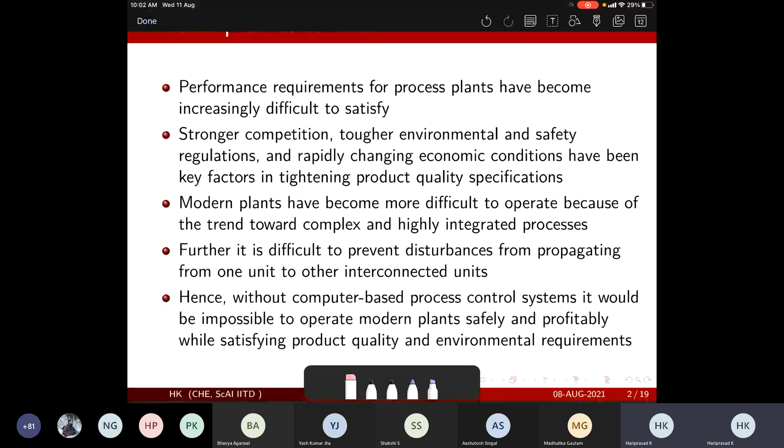The most important aspect we are looking at here is we are trying to see process not as an isolated unit, but as process plants. In the other unit operations, for instance heat transfer or reaction engineering, we might try to see isolated units. For instance, we would like to see heat exchangers, or maybe a reactor. Then, of course, if it's a fluid mechanics problem...

So there is some lag, I guess. Give me a minute. Yeah, it is done.

And maybe if you are looking at transport, mass transfer or heat transfer, you might look at another individual unit, for instance distillation. And if it is fluid mechanics, you may talk about pipe flow and so on. So what I am trying to say is, we were focusing mostly on individual unit design or how it works. What process control is talking about is the process plant as a whole. So you are trying to see the concerted effort of various process units which are working together. So all our arguments would make the most sense when we are dealing with a process plant.

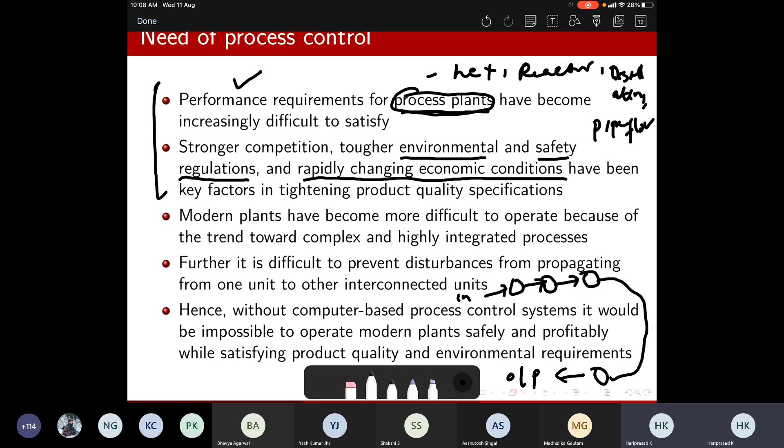So you are not talking about one unit, there may be units which are connected. Your raw materials would start from unit 1, then it would percolate, and it may go to n number of units - you don't know that. This may be the output, this may be your input, and this may be your output slot. And what eventually can happen - input can also be from multiple units. Let me tell you an example.

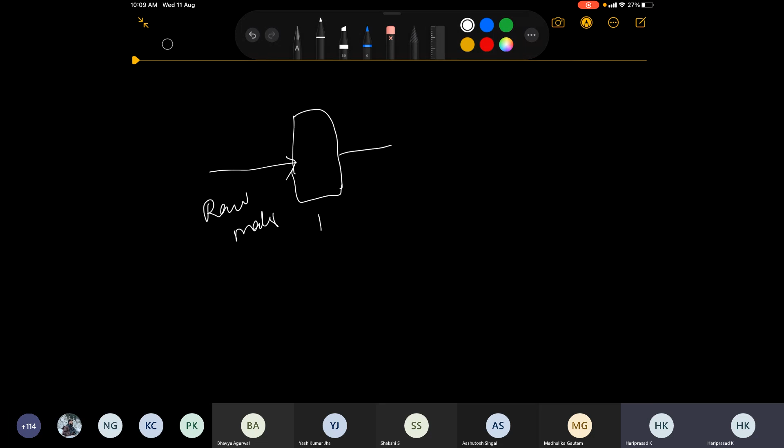Of course, you will have n number of units. So you may have your raw material, then some pre-processing, for instance basic pre-processing. Then it might go to, I'm talking about simple, a pre-cleaning stage. Before you need to do something, then it might go to a reactor.

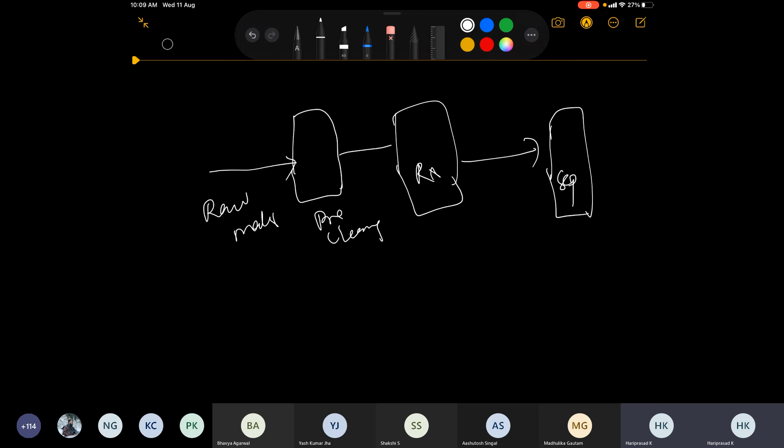Then it may go to a separator. Each of these reactors may have heat exchangers in line, so the reactor might be connected with heat exchangers to maintain necessary temperatures, and so on and so forth.

Same with separation, you may have something else. For instance, there may be co-current flow of something to separate, or counter-current flow of something to separate. Finally, after X such transformations, you would get eventually the product which you are selling into the market.

As you would really see, each of these individual units is getting its inputs from the preceding unit. Of course, the raw material may go to unit 1, then it may go to unit 2, which is connected with unit 1, and so on and so forth. Eventually, unit n is definitely connected to unit n minus 1.

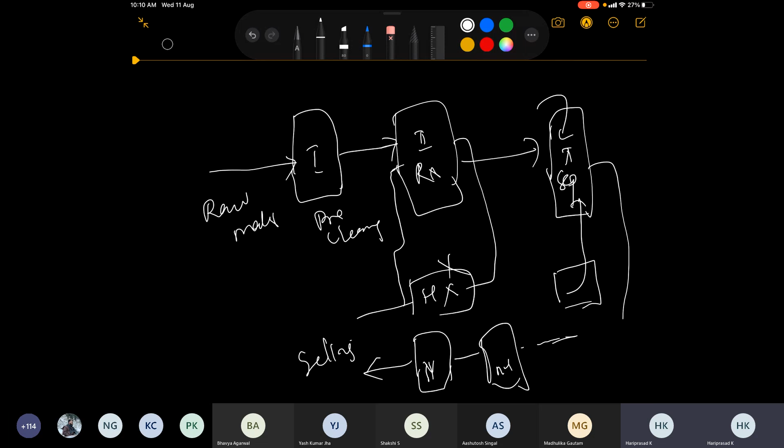So the problem here is that, let's say if something bad happened here, for instance, let's say the heat exchanger got tripped. What is going to happen? Your reactor temperature could go up.

That eventually would happen. You might start sending the undesirable product to the separator. Then the separator load would increase, because you need to have more pure output. So this would possibly, if there is a pump here, and if you're sending some absorption liquid, the load of the pump goes up. Eventually, the whole system would go under tremendous stress.

So what we are trying to say here is that, due to this enormous complexity, it is very difficult to prevent the chain of transmission of disturbances. Disturbances could be anything, as I told you, it could be just as simple as switching off your pump or tripping off your pump. So it's impossible for one person, or maybe even a group of people, to manually manage this.

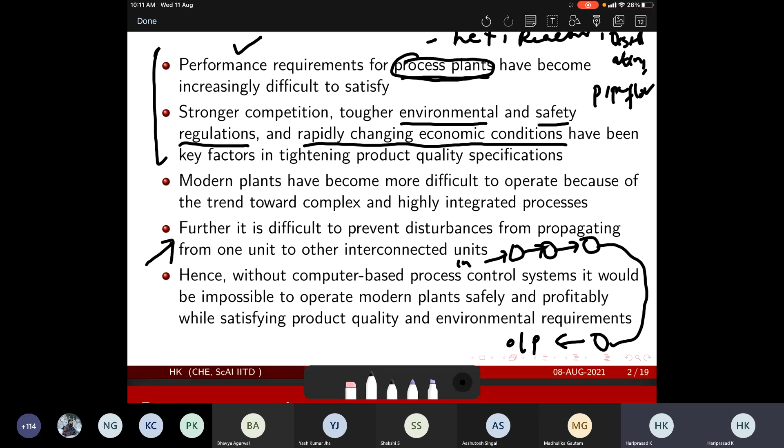Let's look here. So there are n units, and let's say each of these units would be doing some certain unit process or unit operation, and there are multiple parameters associated with it. For instance, you may need a desired temperature, a desired pressure, you may need a desired flow rate. Then, for instance, you need a catalyst with certain packing efficiency and void fraction.

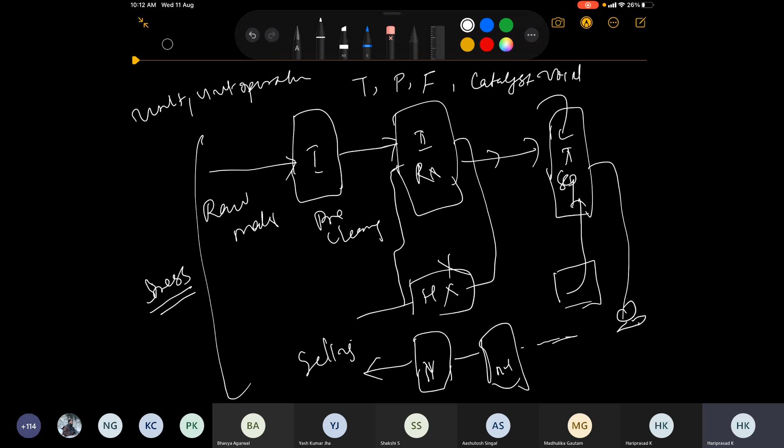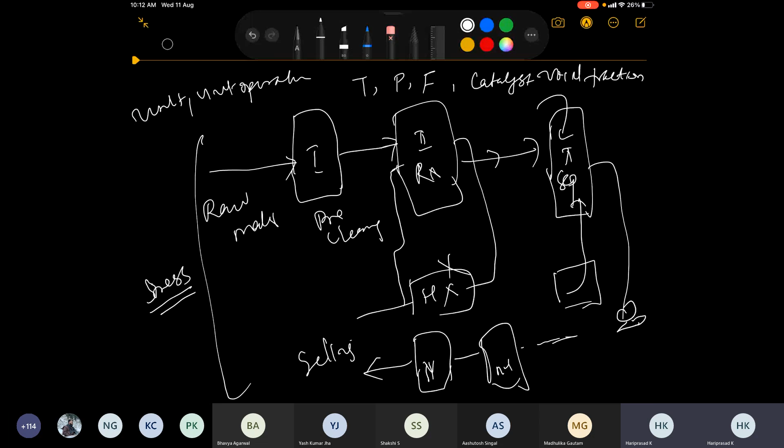So when you start listing the parameters, it's eventually going to be a very difficult thing to kind of bookkeep. And as a man, it's even difficult to do it manually. Bookkeeping itself is difficult, and manual bookkeeping would make it further difficult.

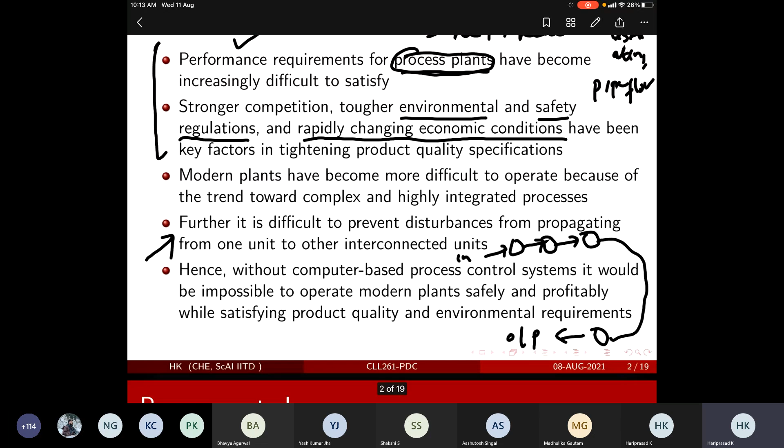So what is the solution? Automation. So what will you do? What would happen in automation? Of course, things are controlled remotely, and you only need minimal manual intervention. You cannot get rid of manual intervention at any point in time. Even if you are using a driverless car, at some point you may need to do a manual intervention. So manual intervention is impossible to remove wholesale, but you will be able to reduce the level of manual intervention.

So why? What's the advantage of that? If you reduce the level of manual intervention, then the level of subjectivity is getting reduced. So what is the advantage of reducing subjectivity? Humans are very subjective, so his or her decision would be mostly dependent upon various factors, including the emotions at that particular time.

So it's important to take away all such subjective decision making, because you are playing with a huge market wherein a 1% error in decision making can even result in loss of millions of dollars.

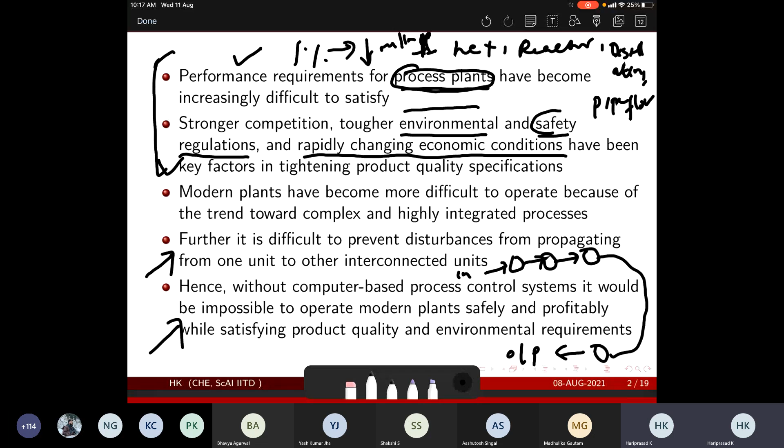In process plants this becomes most critical. Automation, as I told, is an interfacing area. Many of your colleagues and other students would also be learning automation in different ways. For instance, electrical people might be learning this - they would learn it as control theory.

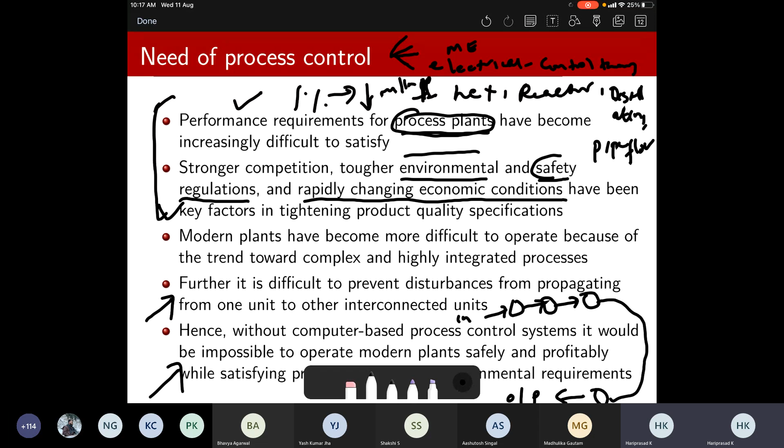I would assume mechanical people would also learn a little bit because they would need to do the production and some aspect of that, as I told in CS. So eventually everybody would try to employ this because automation is a very general keyword. Even you could automate your business - that has nothing to do with process control.

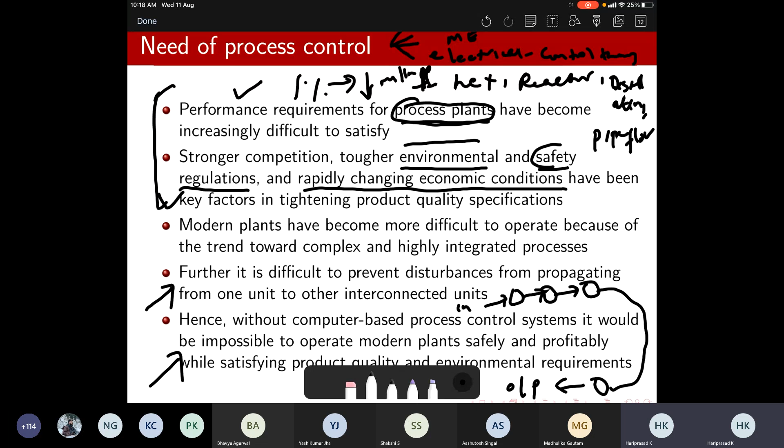But the automation of the overall process plant is more non-trivial because you are dealing with systems, you are dealing with human in the loop, you are dealing with variety of conditions, so on and so forth. So it's a non-trivial problem which is difficult to solve by a human as an individual. So it's better to do automation.

If you are going to go with automation, eventually what is it that we need to do? You're anyway ready to invest. So what is the best thing that you would be able to do? The control system, or whatever the process control system is, will be able to maintain a process at the desired operating condition.

Which means you have lesser trouble, safely and efficiently, because keeping it safe does not mean that you can also lose out on the dollars. So it has to be meeting your economical equation, and of course environmental regulations.

You would see the carbon footprint and recent news articles regarding IPCC wherein the emissions are leading to - it is sure that over and over the environmental norms are going to be stringent. It would also bring in a lot of stress, and most importantly, the quality.

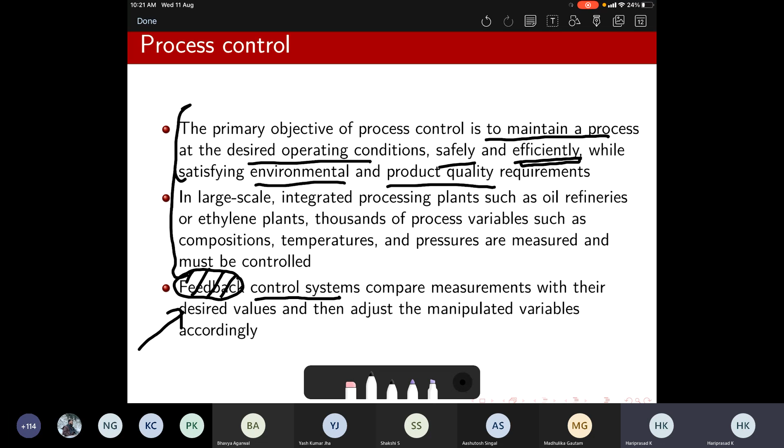So forget about this word feedback for now - we will learn this in more detail. So what is the advantage? You have to play a game, right - so what is available, what is in your disposal, and what do you need to achieve?

So you have to achieve, of course, this is your problem statement. You need to achieve process operation at the desired condition safely, etc. What all things are available to you? By blanket understanding, by doing a process control system, you would achieve this. But process control system also needs some guidance. So what is its degree of freedom to play with?

So there are sensors in the plant, various sensors. Consider any example where you would like to do automation. For instance, a driverless car. There are a lot of sensors that track GPS information, road traffic information, proximity to the nearest vehicle. Similarly, in the process plant, all these units are equipped with various sensors that measure key variables.

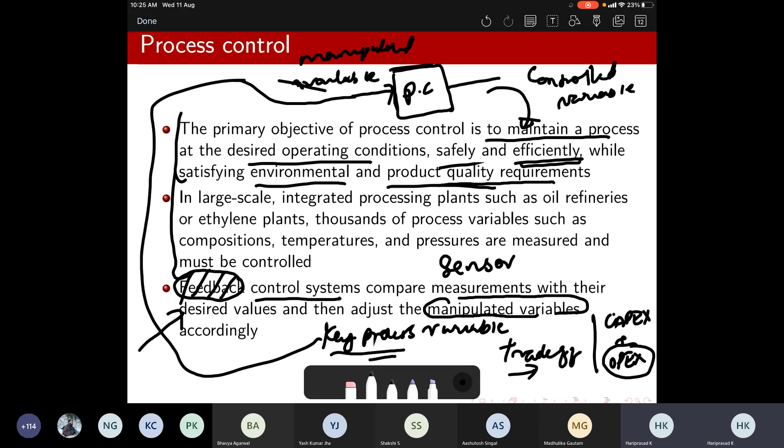As I told you also yesterday, we have to learn process dynamics to learn process control. Why? Because if we are dealing with real time, consider you're driving a driverless car. You have to take decisions with respect to time, every instant, every second, or even every millisecond. So you are working with a system that is fully in unsteady state condition, or you call it transient, or even dynamic. All of these words are namesake, so you may use any of them to represent the overall strategy.

While when you design, things are all at steady state. So you might not be using this dynamic information when you design a heat exchanger, because it would be designed for a maximum capacity, assuming this is the maximum value it takes. So they are all steady state. Whatever you have learned would be mostly the design or design equilibrium relations, and equilibrium is a steady state condition.

So you cannot approach this problem with that context. Things are all dynamic, so you probably need to look at the problem in a dynamic framework. You have to learn a system. Of course, the process systems won't change, but the way you approach them would change. You should be able to model them dynamically.

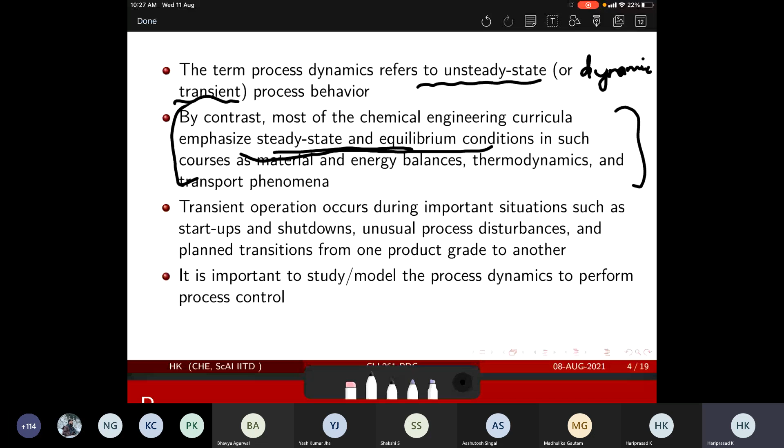All the operations in a process plant are highly dynamic. I don't see any case where it would be steady state. So while you design, you do it for steady state, otherwise you will not be able to design. You consider a maximum operating condition, a maximum capacity condition, and design for that, assuming anything below this capacity would work well. You will not operate anywhere close to or exceeding the full capacity, so a factor of safety is included while designing.

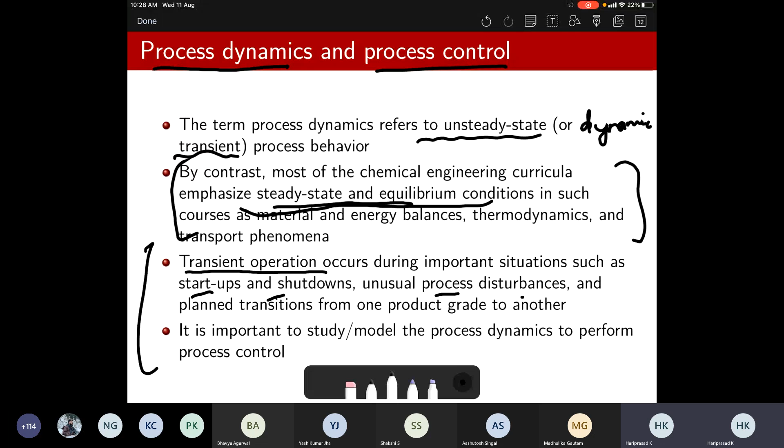But when you run an operation, you will have to look at how it varies with respect to time. For instance, startups and shutdowns are everything transient. In startup, your conditions would change from time to time. In shutdown, your conditions would change from time to time, and so on and so forth.

That's why we need to really learn the dynamics before we embark onto control. Learn the dynamics clearly, because all your decisions for control depend upon the dynamics. So dynamics is what dictates you to take a particular control action. Eventually control means it's an action, and this dynamics is what dictates what action should be taken. This action would again drive you to another dynamic condition, so this is an ever-running loop which is feeding back and forth.

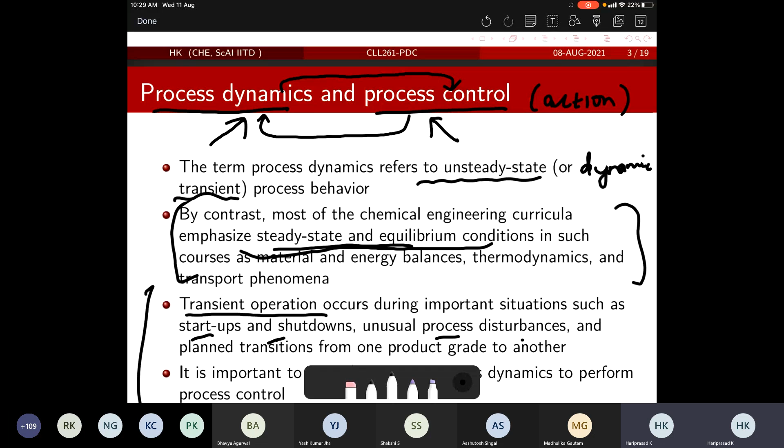Before we go ahead, any questions at the moment? If you have some queries, you may also keep writing in the chat. Maybe after some time when I take a pause, I'll be able to read it and give you feedback. But if you need to instantly shoot questions, that is also welcome. Anything is fine. Any questions so far at the moment?

I hope I am audible to all of you. Yes sir, you're audible, but there's a slight audio issue—some people are reporting that your voice is breaking in between because of some interference. Okay, so whenever that happens, do let me know immediately. I hope it is fine now. I'll just ask the few students who reported it. Okay, give me an update, meanwhile I'll go on.

So eventually, you will have to see your decision space. You will have to deal with process—material can also undergo a conversion from feed material to product. You would have chemical or physical operations. A chemical operation would imply a reactor. A physical operation would involve cleaning, separation, heat exchange, and so on and so forth.

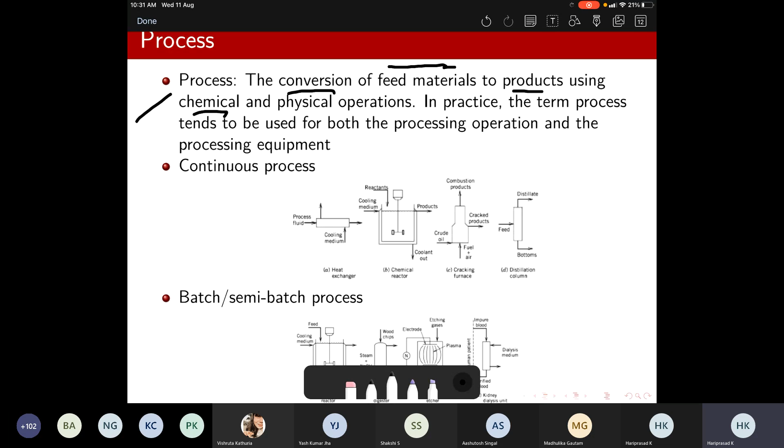Now you will have to see the level of complexity you will have to deal with. The process could be continuous, and it could also be batch. What is the difference between batch and continuous operation? You might have done this in your CRE lab. Continuous is ever running—for instance, a CSTR is a clean example.

In batch, you charge everything and let it run for a fixed time. Most likely it will be a fixed-time batch—you charge all your feed, close the knobs, everything, and operate it for a fixed time. So unlike continuous operation, none of them would eventually lead to a steady state.

Continuous operation would lead to what is known as quasi steady state. What do you mean by quasi? I will talk about that. While batch process will not attain any steady state—it is fully unsteady state.

Quasi steady state means, let's say you are looking at a temperature with respect to time. For some point in the window it might look to be steady, but it is varying. So if you look at the delta time, it may look to be steady—this is quasi steady, and batch would be fully unsteady. So depending upon your decision making and the problem you need to work on, the decision making would also be different. Here you may have more room, but there you will have less room, and so on and so forth.

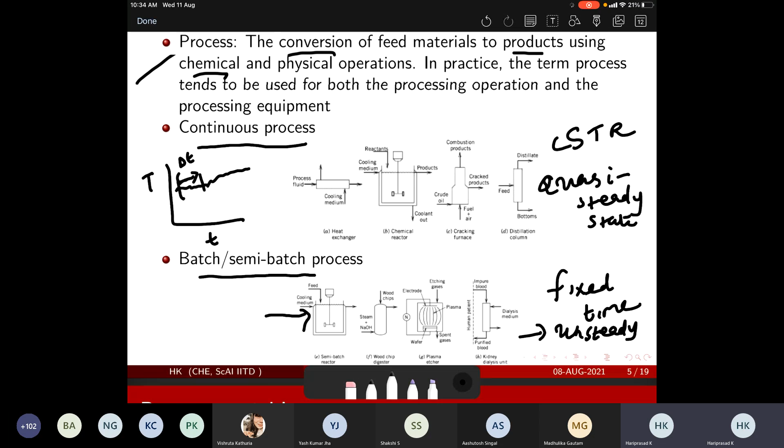Is that audio issue still there, or are you okay with that? The students say it's better now. Okay, let us know if there is a problem so I can check for any network issue and so on. Okay, let's see—hopefully this is clear to all of you.

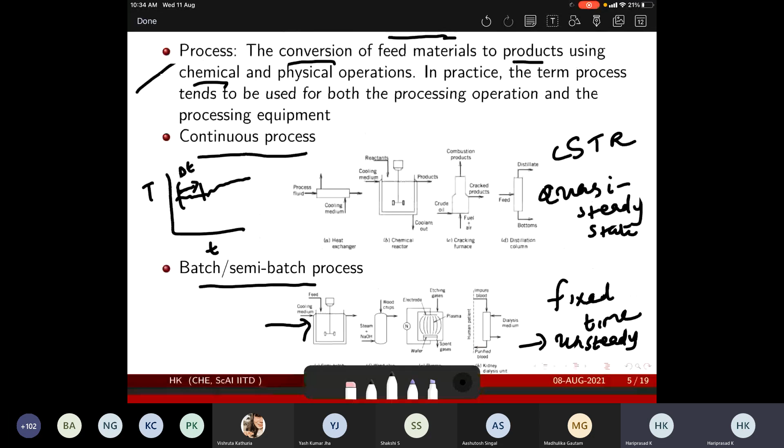So let us see some key terminologies or keywords that you would need to use in the context of process control. One is, of course, our requirement, controlled variables, generally called CV. If you are working in industry, nobody will say control variable, they'll say CV. What is a CV? Of course, not your kind of a CV—it is a control variable, that process variable which is to be controlled.

The desired value of the control variable is called a set point. People might use the term 'set point' or 'set-point', so on and so forth. What is a set point?

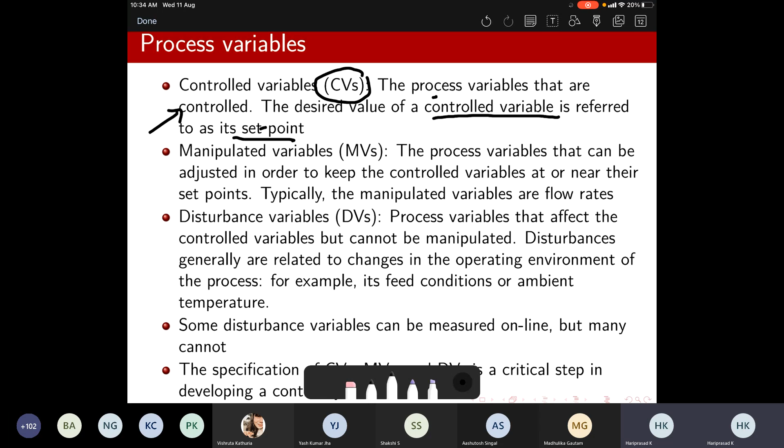Let's say you need to operate a reactor temperature with respect to time. Unlike all other systems, we talk about this with respect to time. This is T, and you will have a T reference, which is your operating temperature that you need to achieve. Your physical temperature will not be T-ref at any point in time.

Let's say this is 350 degree Kelvin. When you start the system, it would be at the ambient condition somewhere here, then it will go up by means of some changes you are making. Then this is your set point.

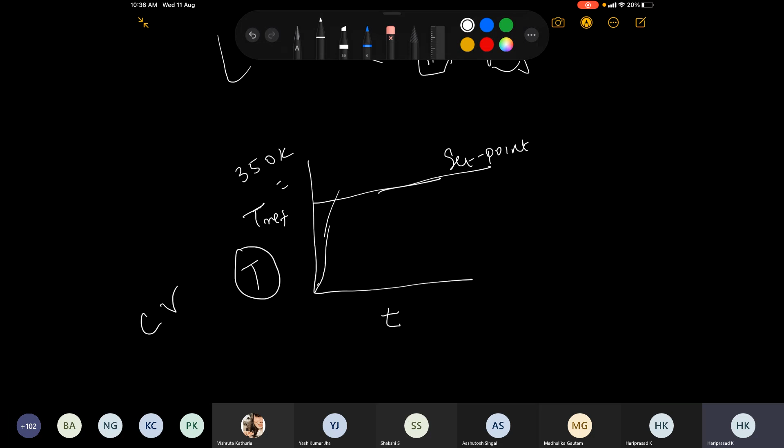Tref, which is T that you need to control, this would be your control variable. As I told you, the temperature will not be equal to the set point. There would be some variability, as variation would keep on happening due to various things.

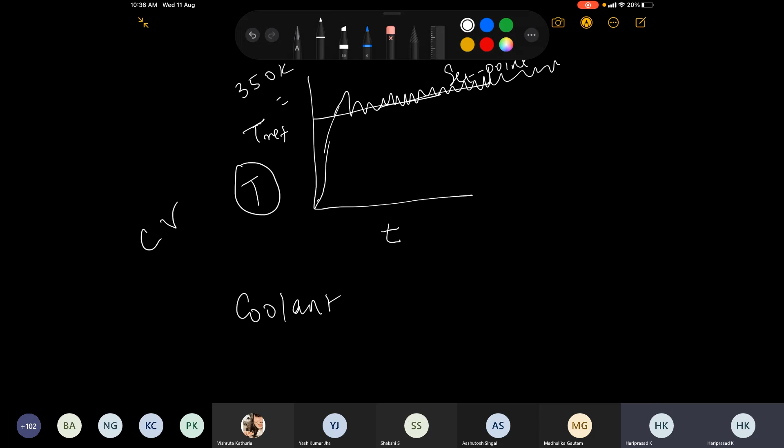Let's say you are using coolant flow rate, because temperature needs to increase or decrease by means of coolant flow or maybe a heating line, whichever it's up to you in whichever plant you are working, whichever is the space for your decision, you might use one of these to increase or decrease the heat.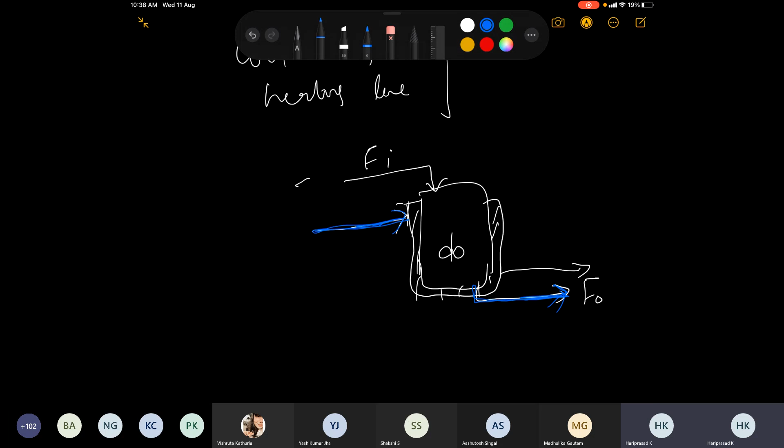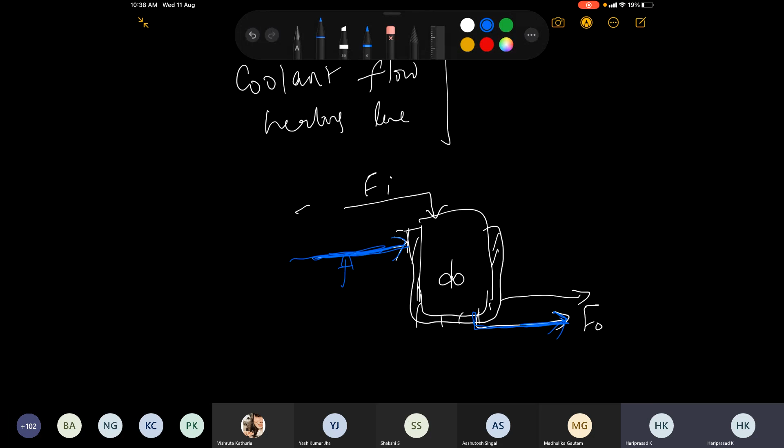Your optimal conversion or optimal yield would be happening at a certain temperature, because all reactions are a function of temperature, starting from your Arrhenius condition, so on and so forth. So you have some room to play around with this heating or cooling line to maintain the temperature. Let's say that is what you are going to do.

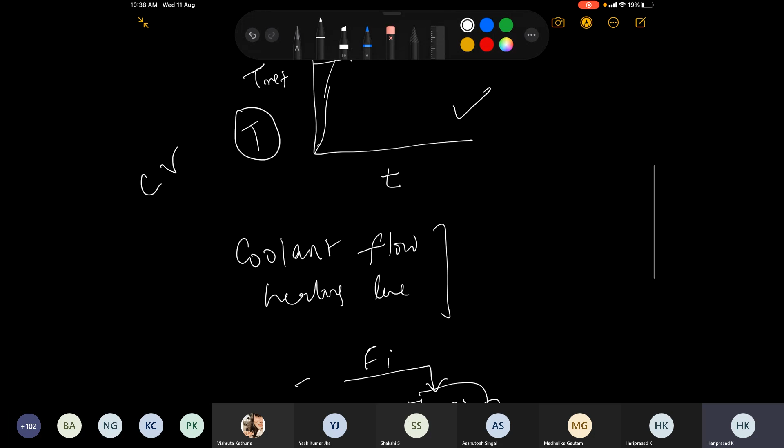So the temperature inside the reactor is your control variable, and the coolant flow, I'll say CF, coolant flow, or maybe heating liquid, whatever you'd like to call it, would be your manipulated variable. They call it MV.

So eventually, what are the things that would result in the output concentration? Eventually, you are looking at the purity of the product with respect to time. Again, with respect to time, that's most important.

Let's say you are manufacturing a drug, then most likely your purity requirement would be 99.5 or above. This is eventually what is expected: while keeping the temperature at the desired level, the reaction would happen and you would get a purity or yield as necessary. So you can play around with the manipulated variable, the coolant flow rate, to achieve all of this.

Let's say you have got a bad feed one day, because eventually it's all market driven and also depends upon economics. Let's say sometimes you decide to take a luck buying a low quality feed, low quality raw material. Low quality in the sense, I won't say it's really low quality.

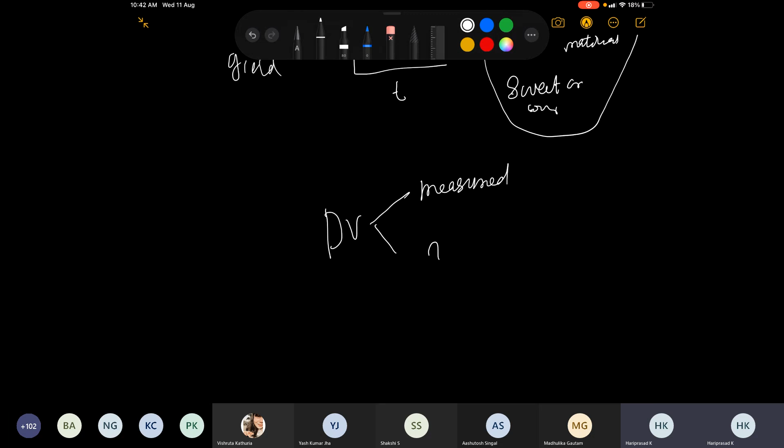Some of these disturbance variables are measured, some are not. So disturbance variables could be further classified as measured or unmeasured. Measured means you could quantify the variability, while unmeasured means there is no means to quantify the variability.

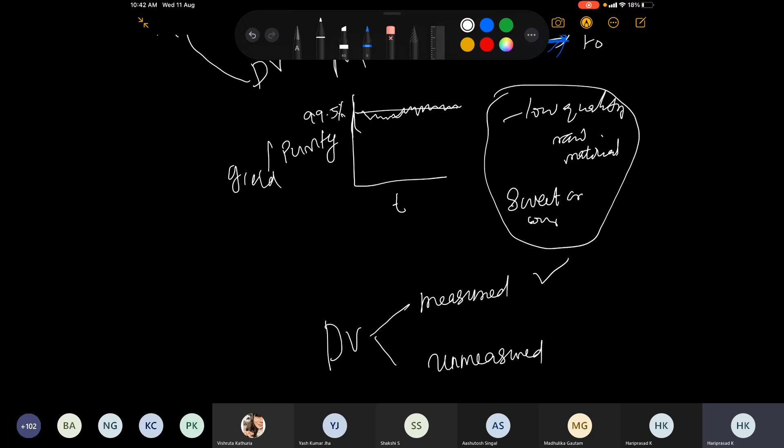In most cases, like crude oil, you may be able to quantify it, because when you buy it, you do a feed check. So you would measure it, and it would be calibrated, knowing that your system is going to get disturbed because you have a poor quality crude.

So we were talking about measured and unmeasured disturbance variables. How do you measure? There may be some analytical way to measure, because when you are buying a feed, you should be able to check. There are analytical ways to check the quality, and so on.

Let's say you are sending this coolant flow rate into the plant. This is your coolant flow, and you are expecting a certain rate. This requires circulation - it would go somewhere and some would come back. You will have a pump here that does this circulation, helping you circulate the coolant.

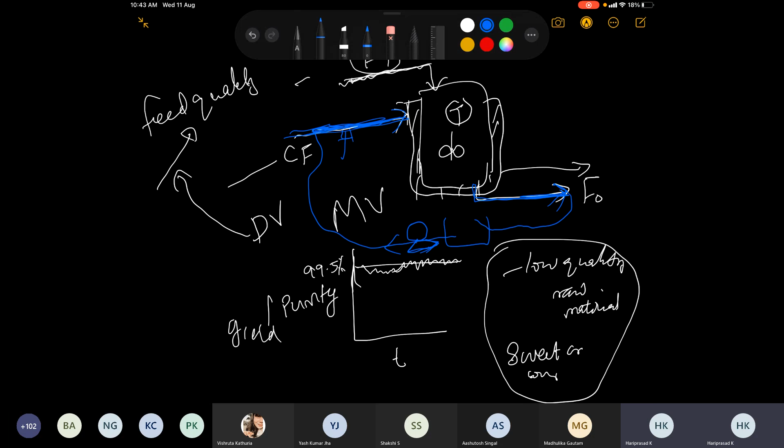Let's say the RPM of the pump keeps on decreasing. How do you measure or detect the pump's output flow rate? The pump specification is in terms of output flow rate, possibly by means of rotation of the impeller, connected to a shaft and a motor running at a certain RPM.

Let's say your rated RPM is X, maybe 100 or 200 RPM, whatsoever - this is what you would expect when you bought your pump, that it would deliver flow at this particular rate. Over time, due to some malfunction, this has become 190 RPM, or maybe 180 RPM. How do you come to know?

Because you don't have a measurement to check the flow rate anywhere, you would assume the pump delivers its rated flow. So what happens? Your coolant flow rate, which you would expect at maybe 10 liters per hour, might keep on varying - it may now be 9.5 or 9.2. That brings in the variability.

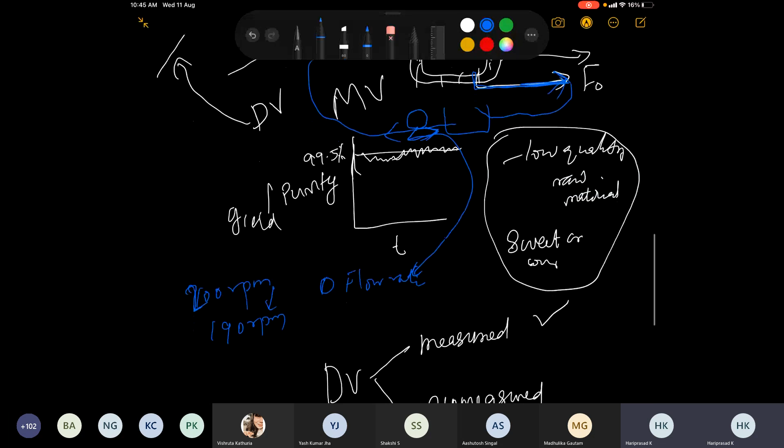There is no way to measure this, so such conditions become unmeasured - it is a disturbance, but an unmeasured disturbance. How do you come to know there's a disturbance? When you start seeing your temperature variability is high, you can go back and check. That's the only way if things are working fine.

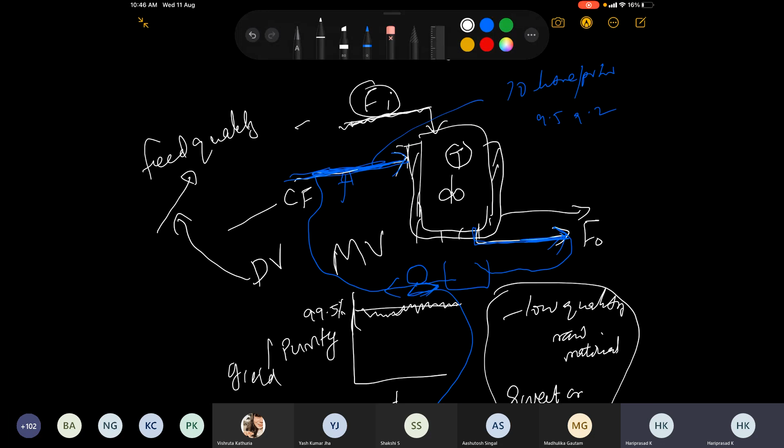The temperature is of course controlled by the coolant, so there is some variability in the control, but you cannot get exact information on how, unless you put a flow measurement here. Then you will be able to get it.

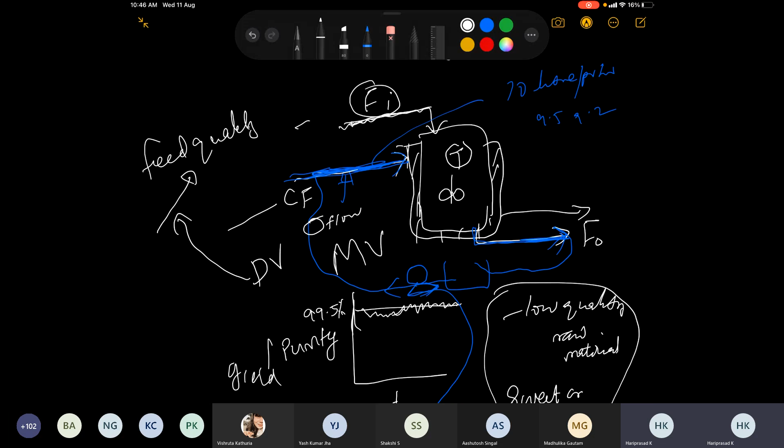As I told you, when you do this trade-off in terms of sensor placement, some sensors you won't deliberately place to save on economics, while some places you will have to keep. At the checkpoints where you don't keep a sensor for measurement, that would eventually become your unmeasured disturbances.

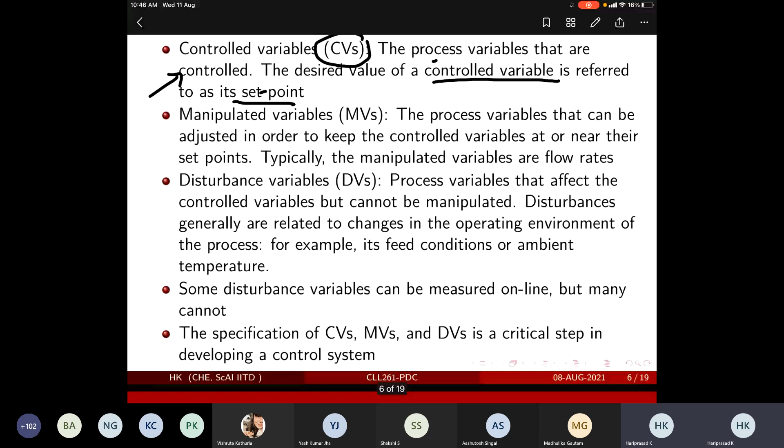Manipulated variable - you can read the notes. Manipulated variables, disturbance variables.

Disturbance variables could also be due to ambient conditions - for instance, a sudden change in temperature, your overall ambient temperature. This may not happen in a tropical country, but it could happen somewhere in North America or Europe. Let's say on a fine day your temperature is close to 30 degrees C.

And in the afternoon it starts snowing, so it goes to minus 2 degrees C. You might have set your whole operation considering it's summer time, expecting lesser variability in temperature - maybe plus or minus 5 degrees - but now you see a drop of minus 32 degrees.

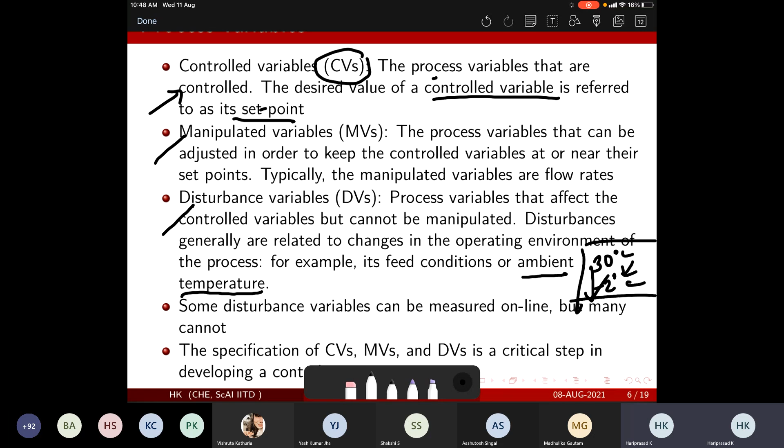These kinds of things you may not be able to predict - sometimes the weather forecast might not give you this. If you got to know by weather forecast, it would become a measured variable, a measured disturbance, and then you would be prepared to deal with it. But in this case, you are not.

Okay, so the key aspect. Let's say you are hired as a process control engineer or specialist in an industry, and you have been asked to design a new plant. You are in charge of the process control team, and your first major job is to identify three things: what are the control variables, what are the manipulated variables, and what are the disturbance variables. All your decision making would depend upon the clusters of these variables.

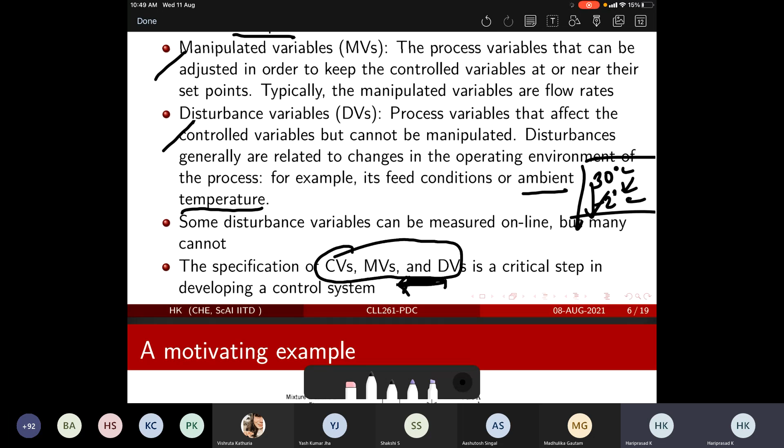That's the problem. We'll go a couple more slides.

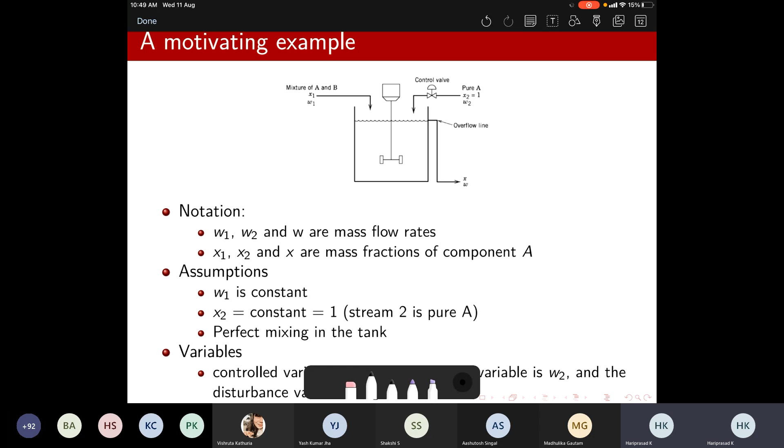Let's consider an example similar to what I told you before. It's a reactor, but in fact this is just a mixer, there's no reaction happening. You have two feeds: this is feed 1, and this is feed 2, and this is your output. What is happening is you have a mixed feed of A and B coming to the mixer, and a pure feed of A coming to the mixer, which you have a way to control.

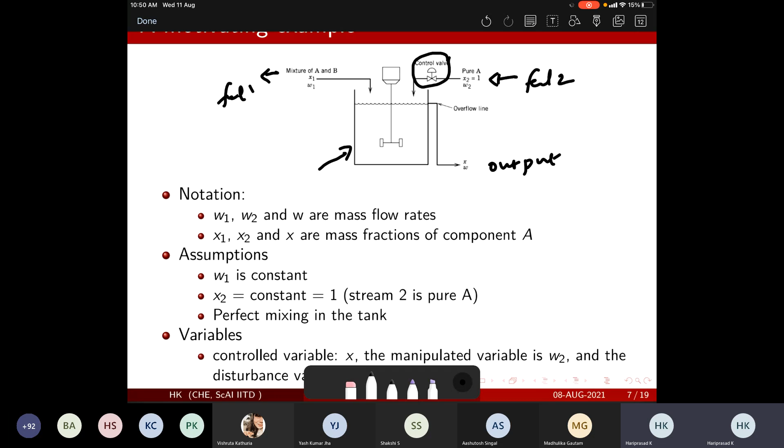So how do you control it? We will see, but assume for the moment that you will be able to control it by means of a control valve. We will see about that.

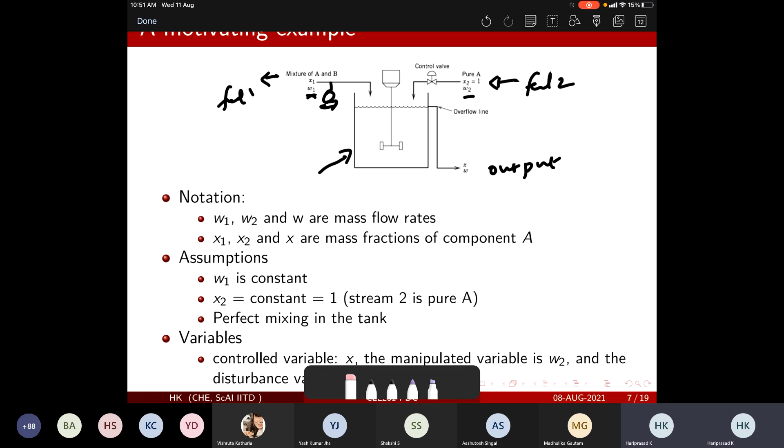W1 is the mass flow rate of feed 1, W2 is the mass flow rate of feed 2. X1 and X2 are the mass fractions of component A in the feed. We assume the flow rate W1 is constant, because you have a pump somewhere that gives a constant flow rate. The second line, W2, you will be able to control since you are a process control person. It is also assumed that X2, the feed 2, is pure A.

What do you need? You need the output concentration to be a desired value. That's basically the mixing problem: feeds in, feed out, and your output should have a desired composition. So the control variable is X, the output composition, and the manipulated variable is W2, because you are playing with it, while W1 you cannot play with because it's at a constant flow rate. But you don't know the composition of X1, it can vary, while here the composition is fixed. You see the gain - here you are feeding pure feed, but its flow rate can be changed, while on the other side its flow rate is fixed, but concentration is variable.

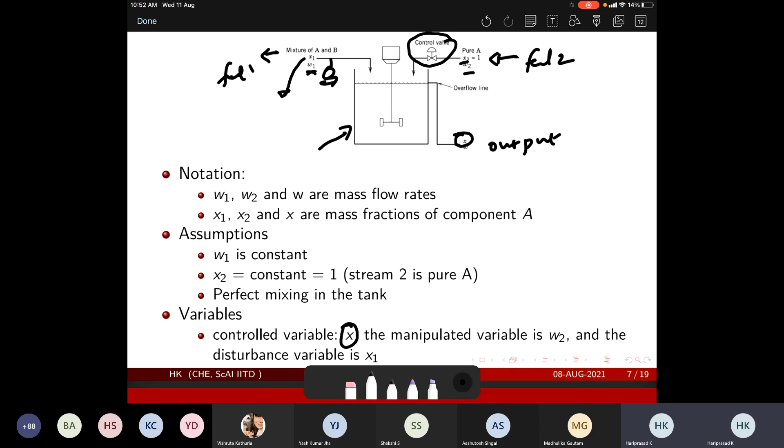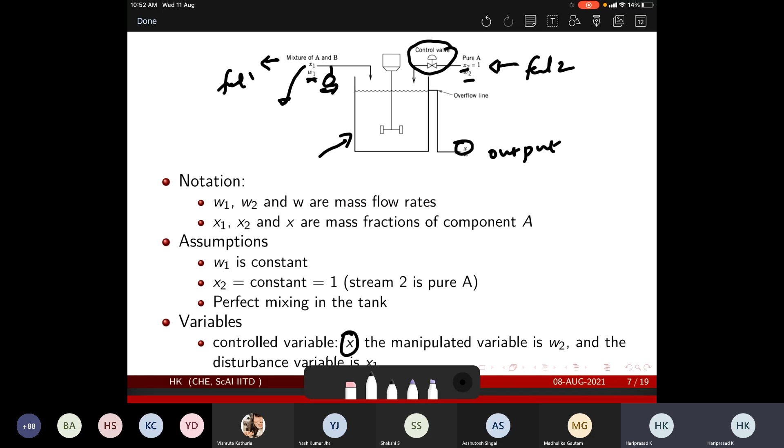So what is the disturbance variable? Because you don't know the value of X1 - at feed 2 only you know the value of X2, because it's pure. While X1, you only know that it's X1, you don't know the value. So this becomes the disturbance variable. And the manipulated variable, because we are adjusting the flow rate, it becomes W2.

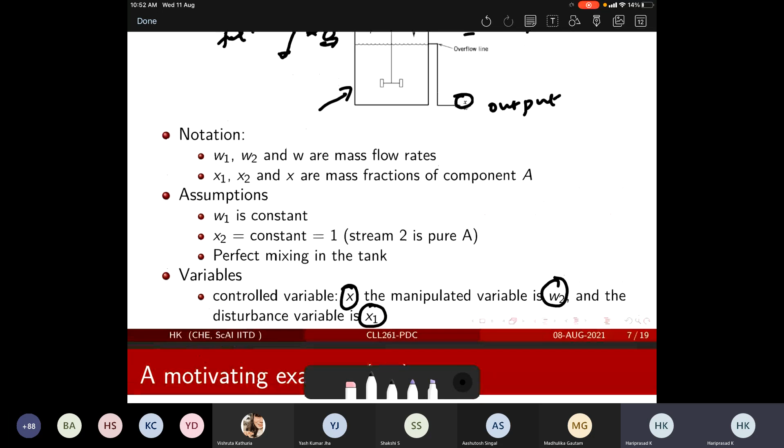Okay, so any questions at the moment? Any questions at the moment?

Can you explain again why X1 is the disturbance variable?

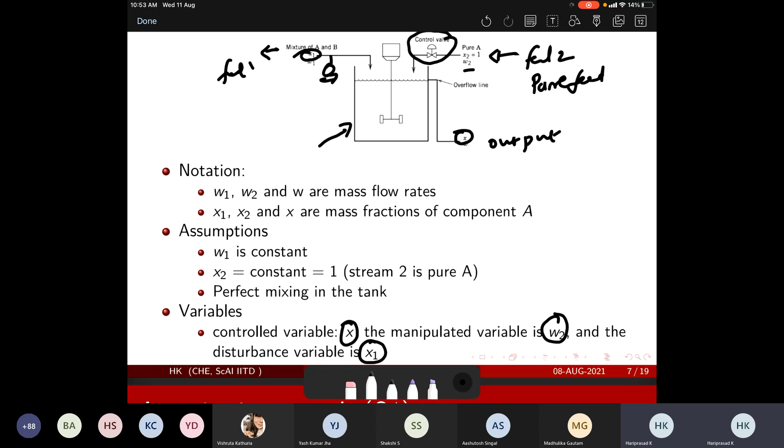Why is X1 a disturbance variable? Okay, if you look at the system, you don't have any information regarding the composition of X1, while X2 is pure feed. Pure feed means its concentration is known to you, correct? While in stream W1, its flow rate is known to you - you are fixing the flow rate - but you don't have any idea what its composition is. If it were known to you, then it wouldn't be. It's unknown, so its variability can make the overall output concentration affected. So it becomes the disturbance variable.

Okay, so now let's try to see what is the... we'll try to see that, if maybe we have 5 minutes. Okay, we'll quickly do both those things. I will quickly take these two slides and we'll wind up.

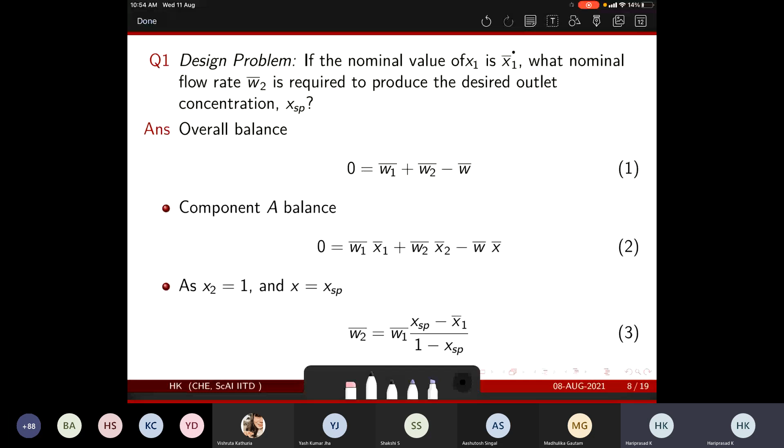So what is the fundamental difference between design and control? That is what I am going to tell you. For design, the designer would do an overall balance. So the problem is, what is the nominal value? If the nominal value of X1 is X bar 1, X1 is X bar 1.

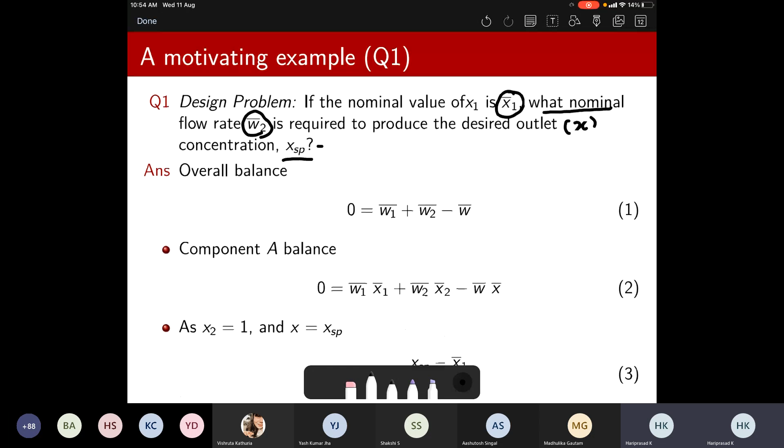What is the nominal value of W2 required to produce the desired output concentration XSP, which is the outlet concentration X equal to XSP. This is how you design a system, because everything is under steady state.

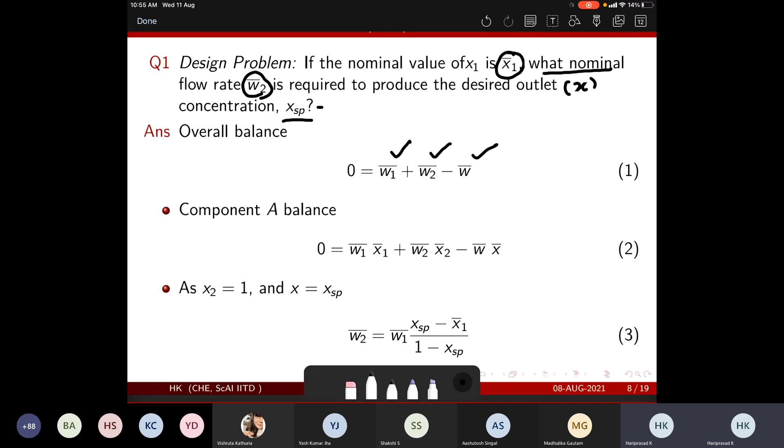So the overall balance is input minus output equals accumulation. There are two inputs, W1 and W2, and outputs. Assuming there is no accumulation, this would be equal to zero.

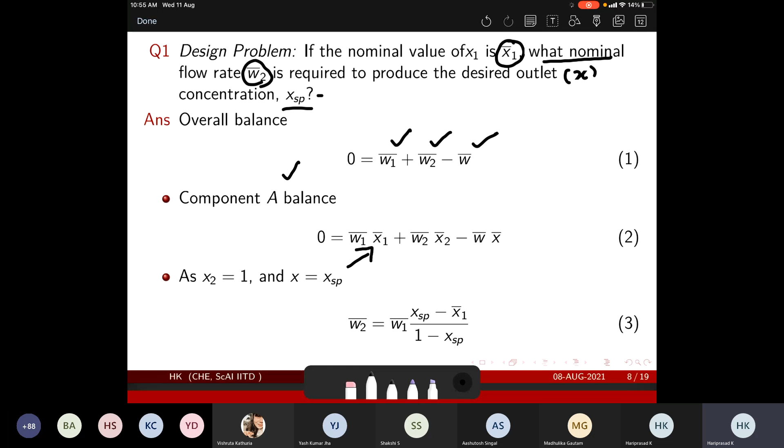Let's say you are given component A, you do a component A balance, W1 bar. This bar indicates that specific value: W bar 1 X1, W bar 2 X2 minus W bar X is equal to 0. It is given that feed 2 is pure, so X2 bar is equal to 1. When you rearrange, you get the value of W2 bar, and this X bar is kept to be XSP as part of the problem. You can rearrange and come up nicely with this algebraic equation.

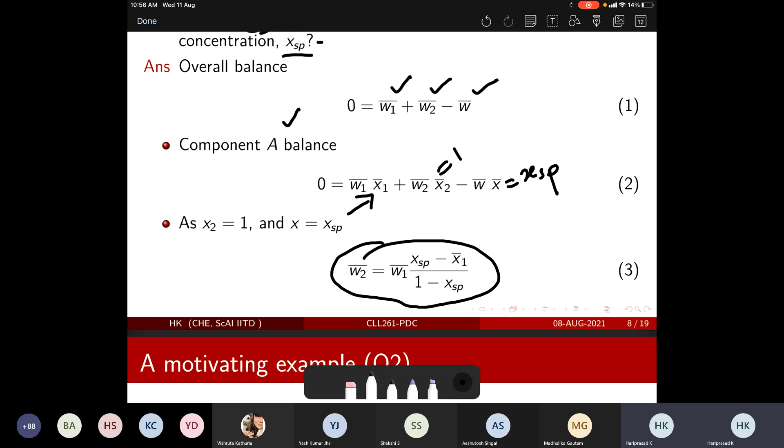So this is how the design works. You are not worried about how the tank level changes, tank concentration changes, anything. Do a balance, find out, and isolate the variable.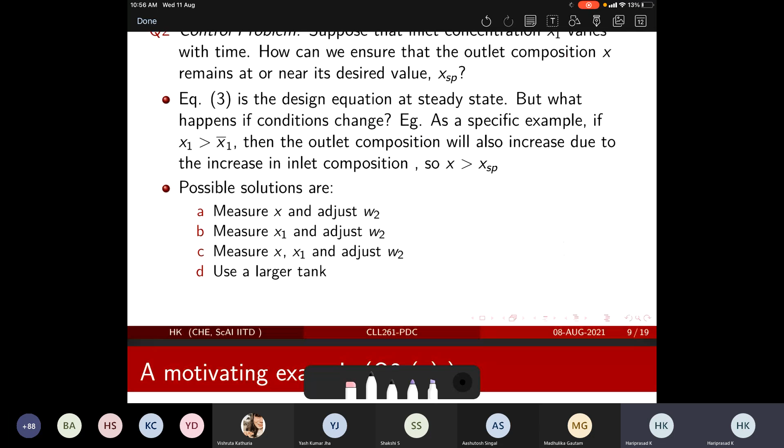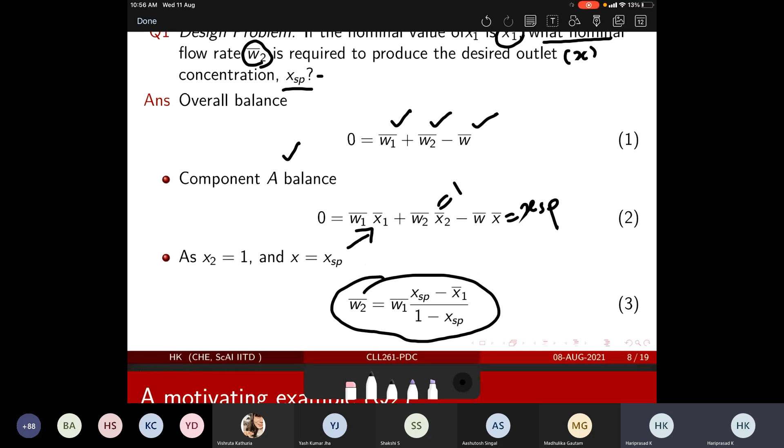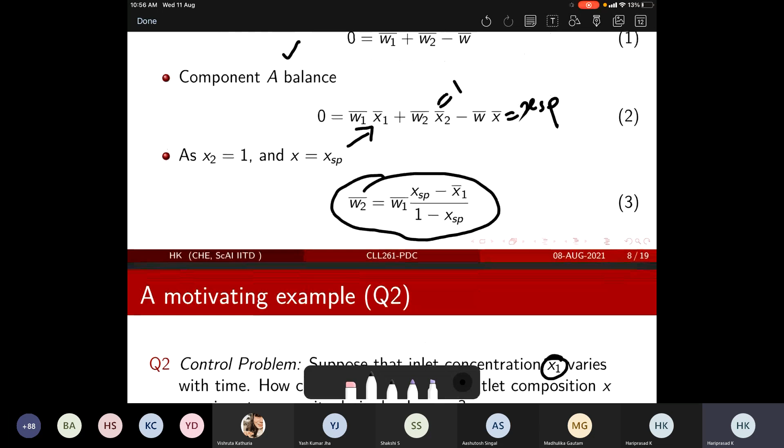In contrast, as I told, X1 is a disturbance variable. If X1 varies with respect to time, but again, you're running the company, you cannot take it for granted. X1 is varying, but you have to sell the product, so you have to take action so that your output X is close to XSP.

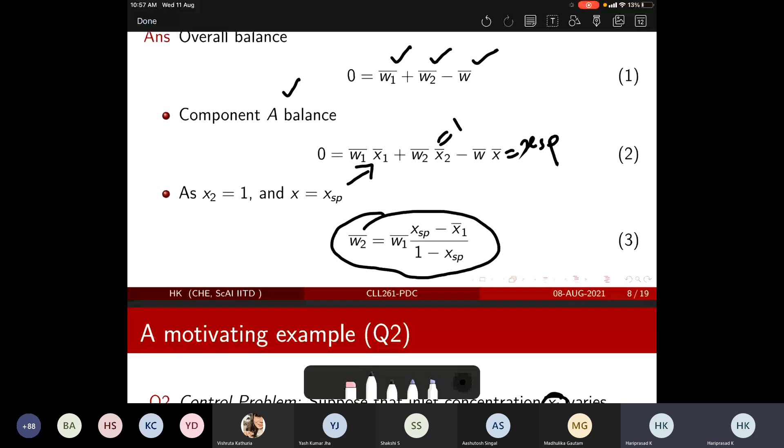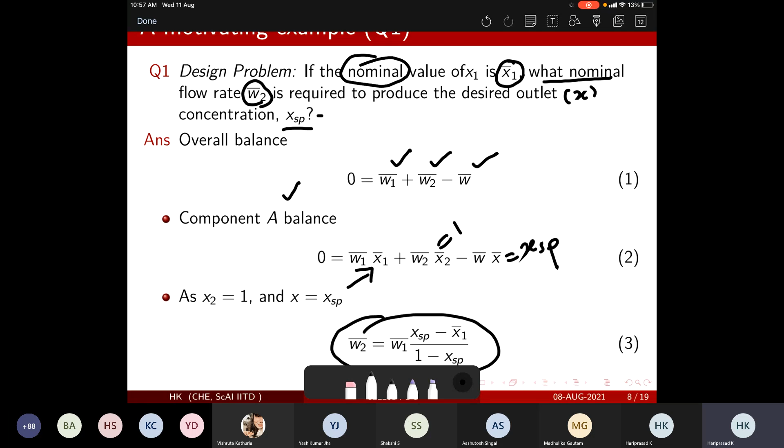So that information is not taken into account in this design. Design is assuming everything is under nominal conditions. This word is very important: nominal, how things work. While in control, your X1 would vary because you are purchasing this from someone, and his feed quality went bad.

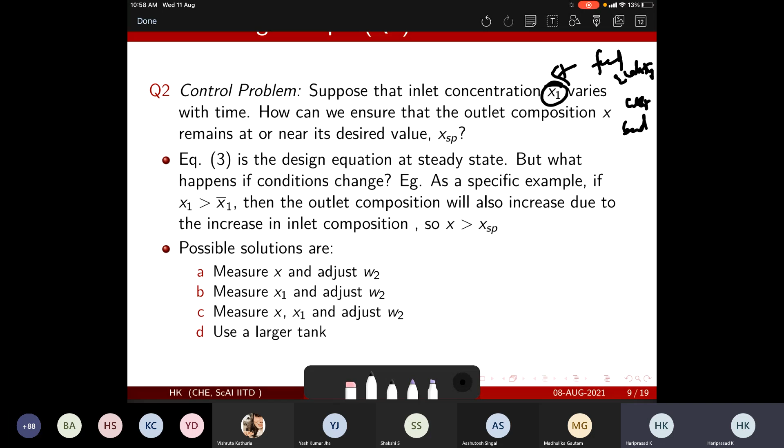So what you can do, you cannot take it just like that. Because your product quality would go bad, and as a result your specification will go bad, and you may be revoked to sell this product again. So you'll have to take an action. There is no control on this, it is coming from somewhere, but you can do some control from your end. This is, I would say, not at your control.

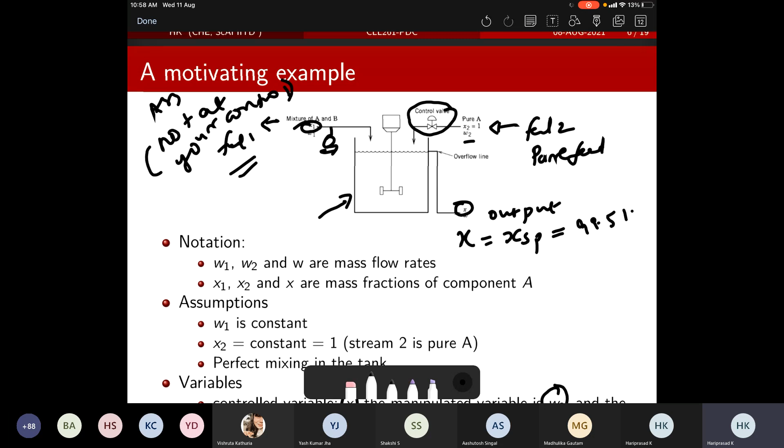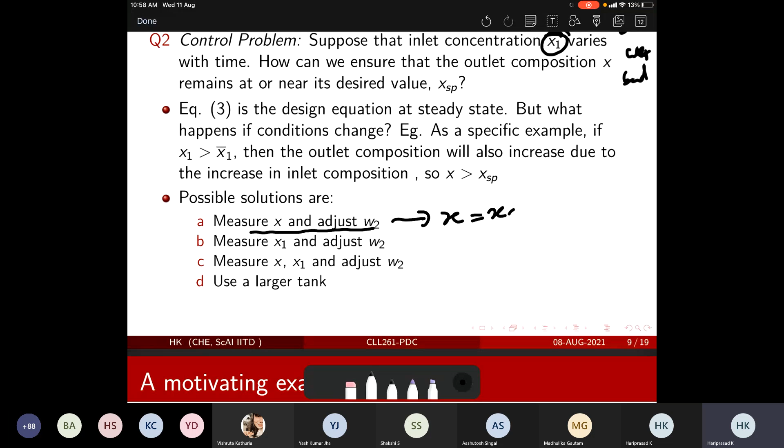Assume that this is not at your control at the moment. So what you can do is measure this, measure the quality, and do a correction, change W2, and still keep X close to the setpoint. So now let's say this is under control.

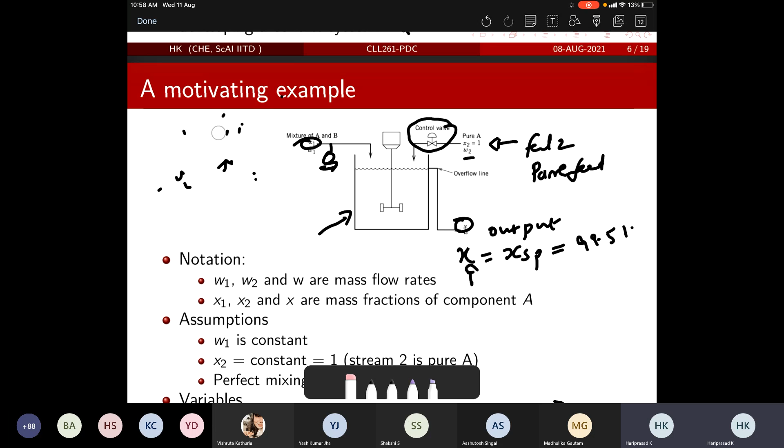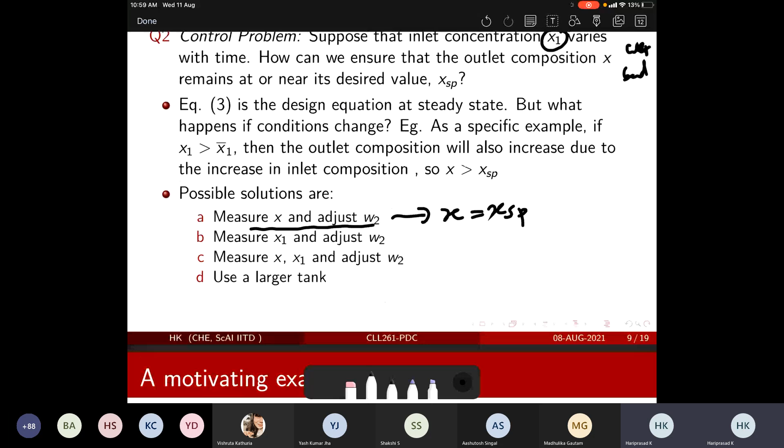As I told, then it becomes measured. Now I was talking about the case of unmeasured. Let's say you keep a sensor here to measure it. Then what you can do is measure X1 and adjust W2, because the advantage of W2 is you already have a controlling mechanism. You can increase or decrease it so that still X is equal to XSP.

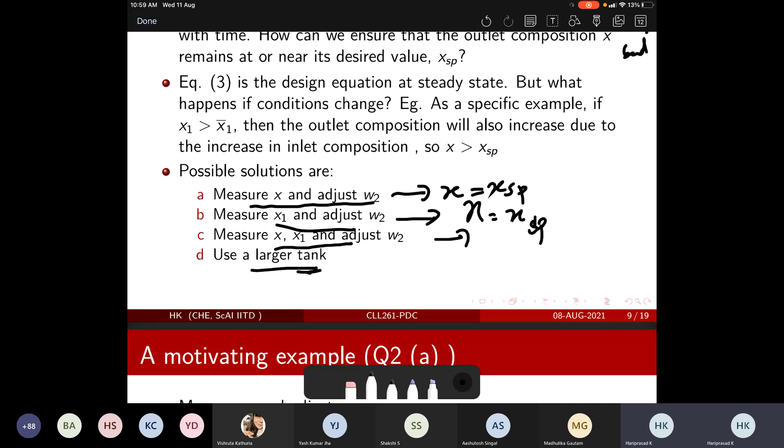And if you are rich enough, you keep both sensors, measure both X1 and X, and adjust W2. Or use a large tank. What do you mean by using a large tank? It means there is less scope of disturbance. Basically, you increase the capacity or damp the unwanted effect.

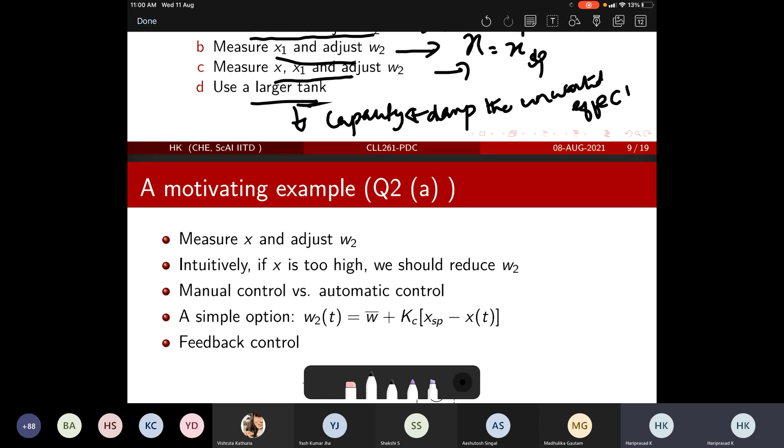What is the problem with that? A large tank means large material of construction, which means large capex. So what all things you can do is what we need to see from this point, and you will come to know.